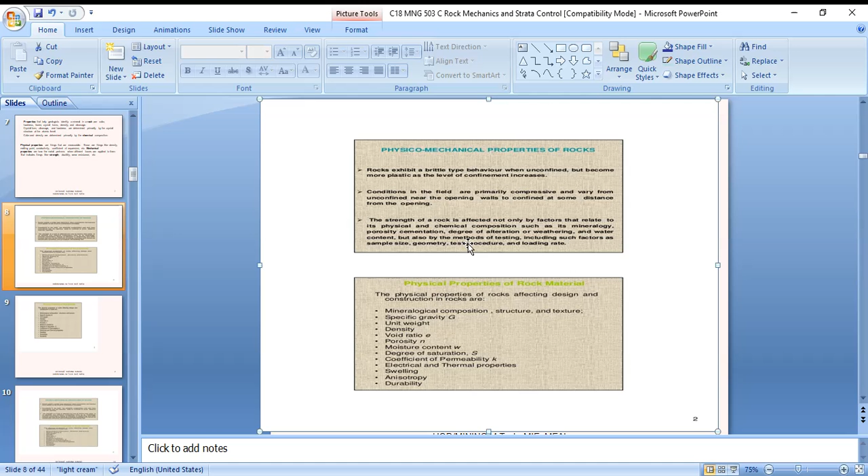Rocks exhibit a brittle type behavior when unconfined, but become more plastic as the level of confinement increases. Conditions in the field are primarily compressive and vary from unconfined near the opening walls to confined at some distance

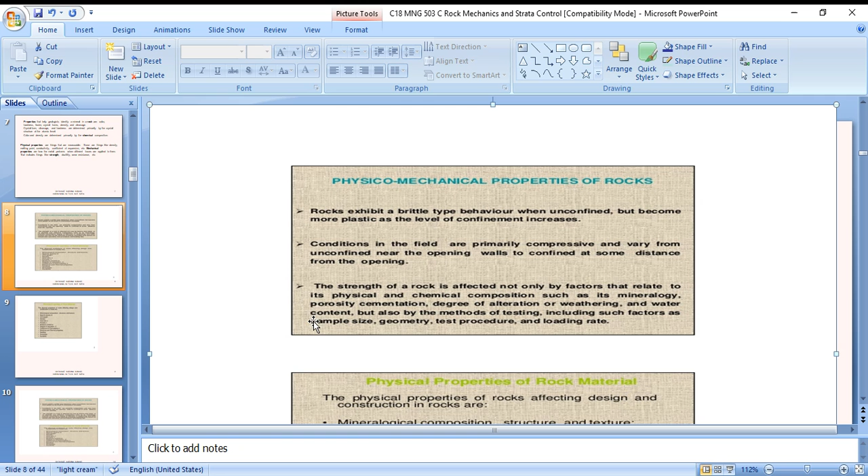from the opening. The strength of rock is affected not only by factors related to its physical and chemical composition, such as its mineralogy, porosity, cementation, degree of alteration or weathering, or water content, but also by the method of testing, including such factors as sample size, geometry, test procedure, and loading rate.

The physical properties of rock affecting design and construction in rocks are mineralogical composition, structure, and texture, specific gravity, unit weight, density, void ratio, porosity, moisture content, degree of saturation, coefficient of permeability, electrical and thermal properties, and swelling. So these are the generalized properties of the concept of the phenomena.

So coming to them one by one: mineralogical composition, texture. Texture is defined as the interrelationship of different mineral constituents of the rock. Based on the linkage between the individual grains, the rocks are broadly classified by the interconnections of the grains, coherent or coalescence bonds between the particles.

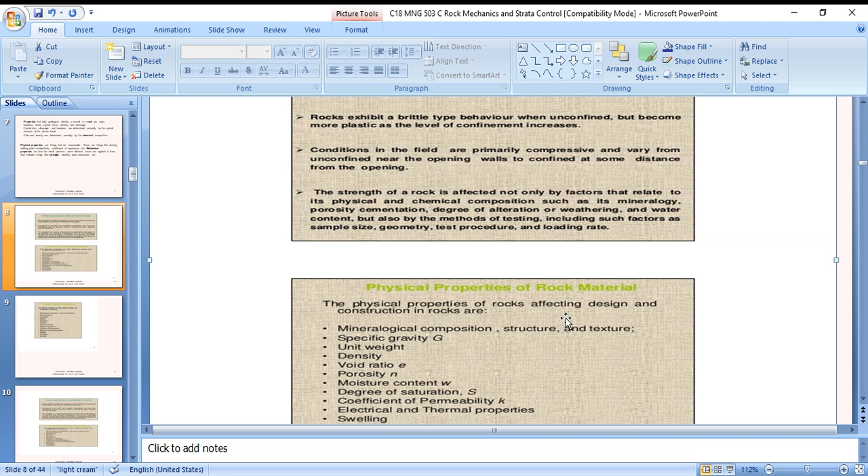Other properties include degree of saturation, coefficient of permeability, electrical and thermal properties, and swelling. These are also very important for knowing the physical properties of rocks concerned. Here is also durability, and some other properties are given here.

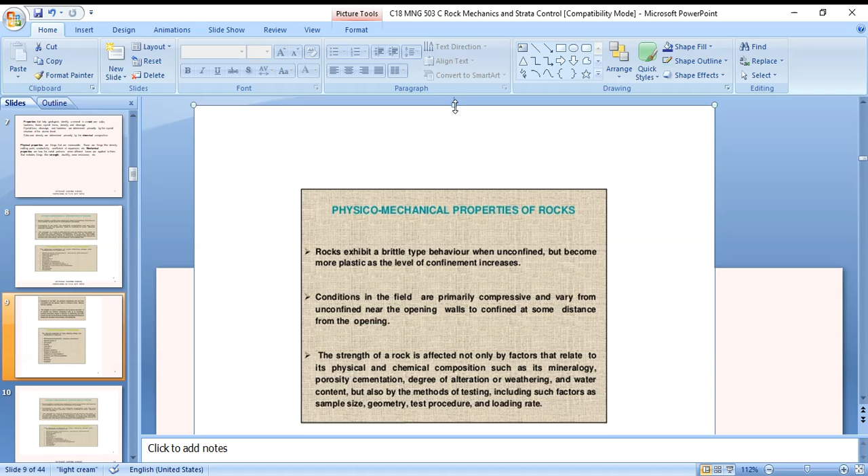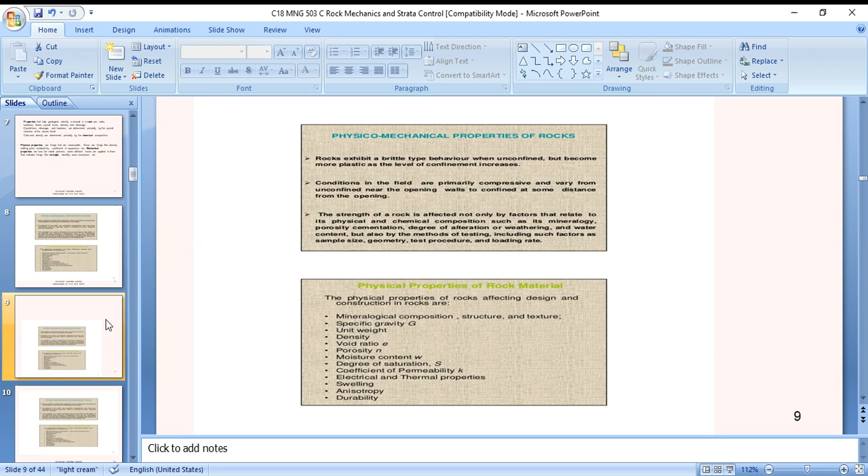Right, so this is one. Another, let's go for a similar one. Physical properties of rock material.

Mineralogical composition is an intrinsic property controlling the strength of the rock. Although there exist more than 2000 kinds of known minerals, only about 9 of them partake decisively in forming the composition of rocks. They are quartz, feldspar, mica, hornblende, pyroxene, olivine, calcite, kaolin, and dolomite.

Specific gravity is the ratio of the density of the solids to the density of water. This is a ratio where Ms is the mass of solids and Vs is the volume of solids. Unit weight can be calculated as W by V, where W is the total weight of the sample and V is the total volume of the sample. Density measures mass per unit volume of the rock.

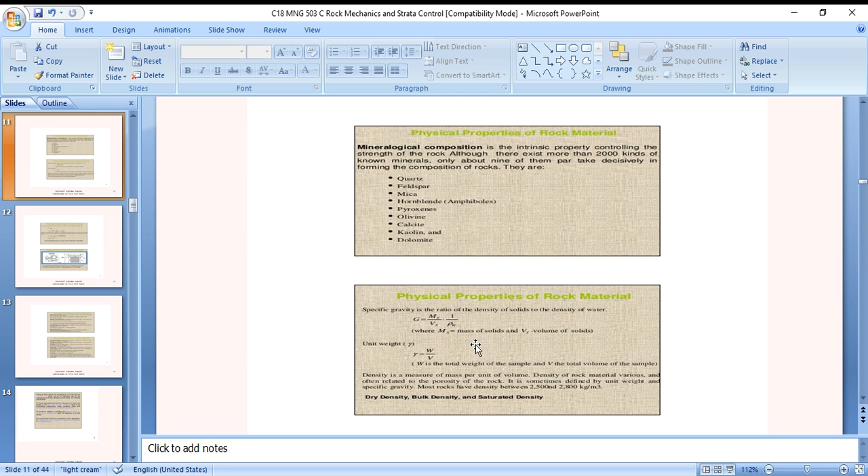Material density varies and is often related to the porosity of the rock. It is sometimes defined by unit weight and specific gravity. Most rocks have density between 2500 and 2800 kg for dry density, bulk density, and saturated density.

Physical properties of a rock material: the void ratio is the ratio of the volume of voids, Vv, to the volume of solids, Vs. A simple calculation by unit weight of water can determine the porosity. Physical properties also have units when considering porosity.

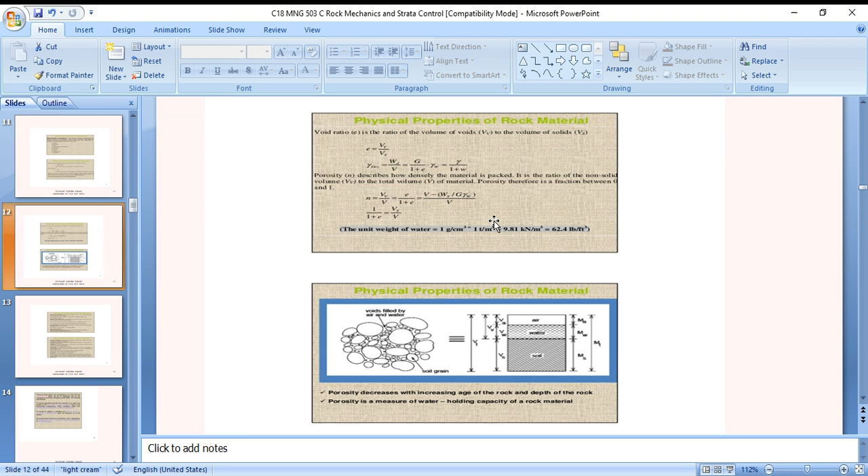Another physical property is moisture content. It is the ratio of the weight of water in the void to the weight of the dry solids in the rock sample. It can be expressed as M equals WW by WS, where M is the moisture content, WW is the weight of the water, and WS is the weight of the solid. This is a simplified formula for the calculation of moisture content.

Degree of saturation is defined as the volume of water in the void to the total volume of the void in the rock sample. So S equals VW by VV, where VW is volume of water and VV is volume of voids. The rock mass having higher porosity has a higher degree of saturation.

Permeability is the ability of the porous material to allow a liquid to pass through it, measured in centimeters per second or meters per second. Q equals K times the discharge area times the hydraulic gradient.

Electrical properties: most rocks have electrical nature, and measures of dielectric constant are used for data interpretation. Electric resistivity method is used in geophysics perspective.

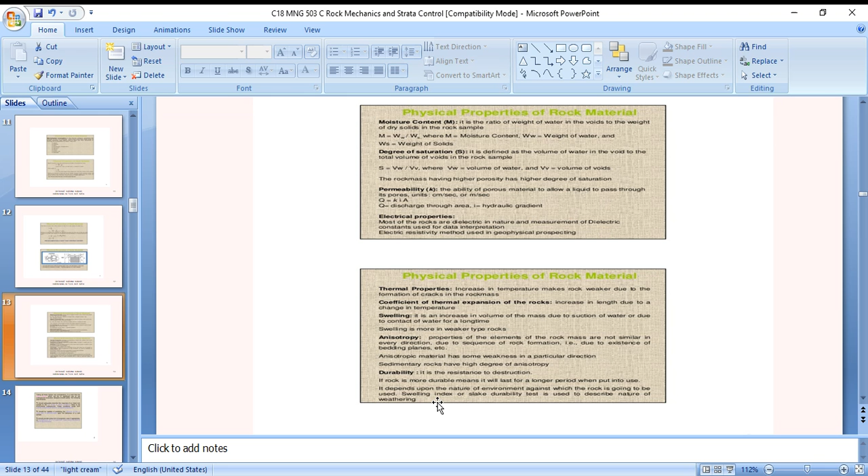Durability is the resistance to destruction. If a rock is more durable, it will last longer when in use. It depends upon the nature of the environment against which the rock is going to be used. The swelling index or slake durability test is used to describe the nature of weathering.

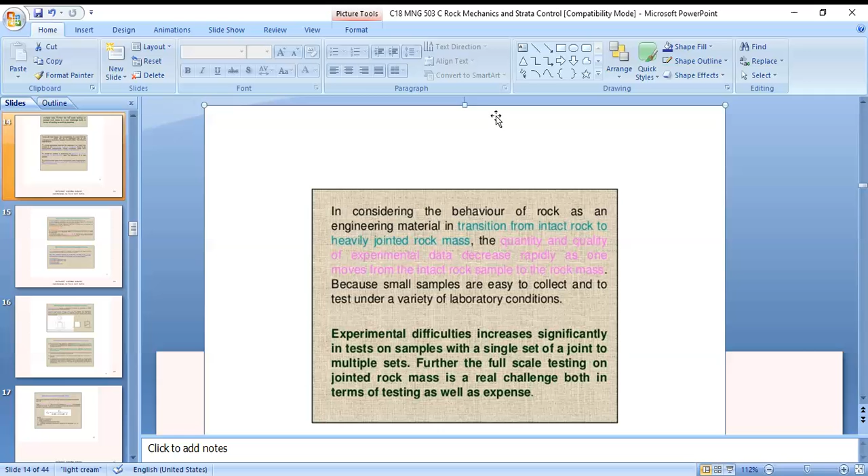In considering the behavior of rock as an engineering material, it transitions from intact rock to heavily jointed rock mass. The quantity and quality of experimental data decreases rapidly as one moves from intact rock samples to the rock mass, because small samples are easy to collect and test under a variety of laboratory conditions. Experimental difficulties increase significantly when testing samples with a single set of joints versus multiple sets.

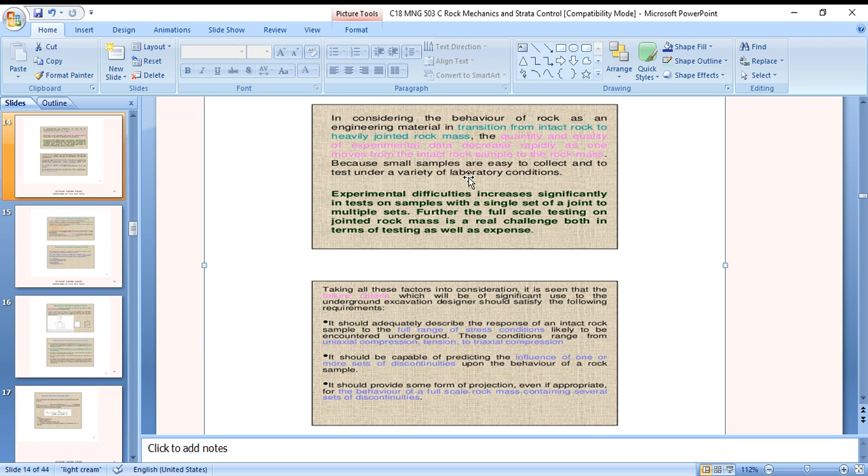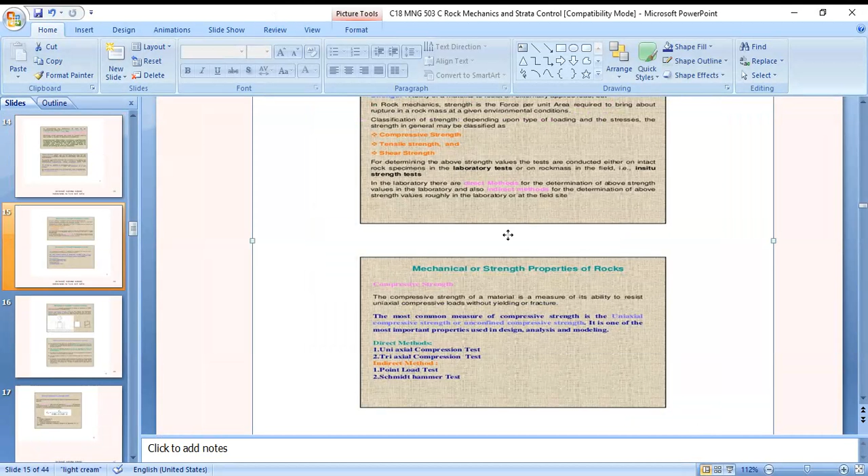So another mechanical property of concern is strength - the ability of the material to resist an externally applied load. In rock mechanics, strength is the force per unit area required to bring about failure of the rock mass, given the environmental conditions.

Classification of strength depends on the type of loading and its stresses. Strength is generally classified as compressive strength, tensile strength, and shear strength. For determining these strength values, tests are conducted either on intact rock specimens in laboratory tests or on rock mass in the field using in-situ strength tests.

In the laboratory, there are direct methods for determining these strengths. Beyond laboratory methods, there are also indirect methods for determining strength roughly, either in the laboratory or at the field site.

The compressive strength of a material is a measure of its ability to resist uniaxial compression loads without yielding or fracture. The most common measure of compressive strength is the uniaxial compressive strength, or unconfined compressive strength. It is one of the most important properties used in design, analysis, and modeling.

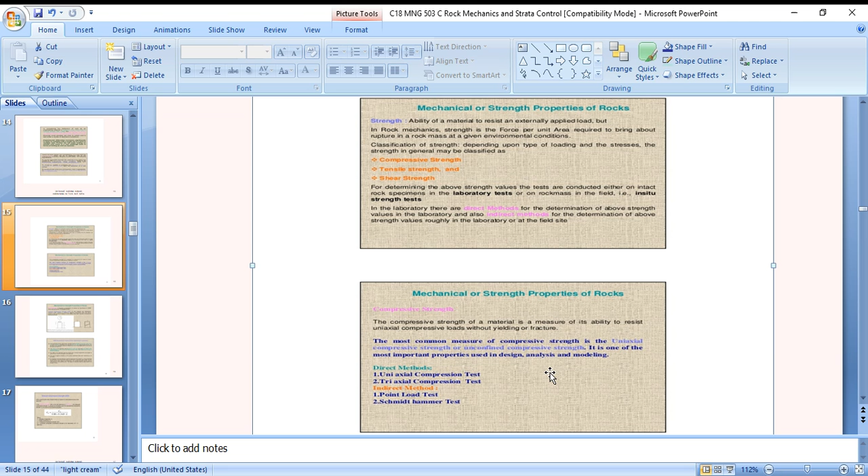What are the breaking strength, compressive strength, and tensile strength? These strengths can be understood through testing.

So uniaxial compressive strength is tested using a UTM. Rock material and deformation behavior under loading is studied by applying compressive load until failure occurs in the core, by a fracture in the middle, using high capacity compressive testing machines.

ISRM standard for testing rock specimens in laboratories: the test specimen shall be a right circular cylinder having a height to diameter ratio of 2.0 to 3.0, and diameter preferably not less than the NX core size, approximately 54 mm.

The diameter of the specimen should be related to the size of the largest grain in the rock by a ratio of at least 10 to 1.

The ends of the specimen shall be flat to 0.02 mm and shall not depart from perpendicularity to the axis of the specimen by more than 0.001 radians, or 0.05 mm in 50 mm.

The sides of the specimen shall be smooth and free of abrupt irregularities, and straight to within 0.3 mm over the full length of the specimen. The use of capping material or end surface treatment other than machining is not permitted.

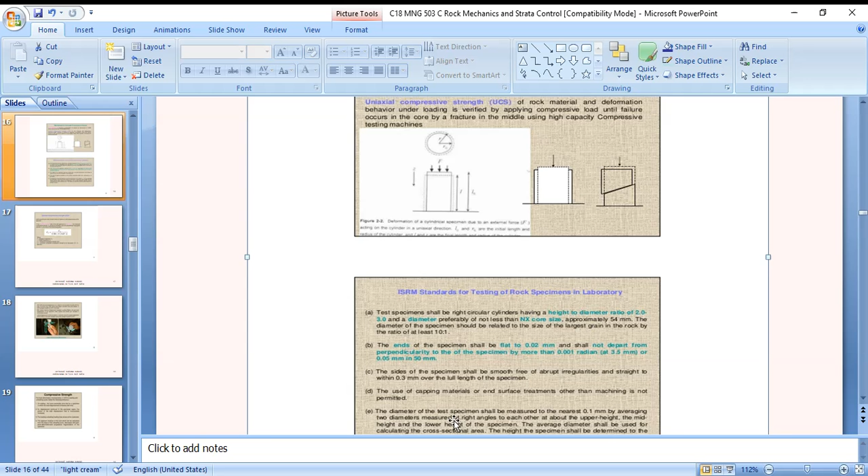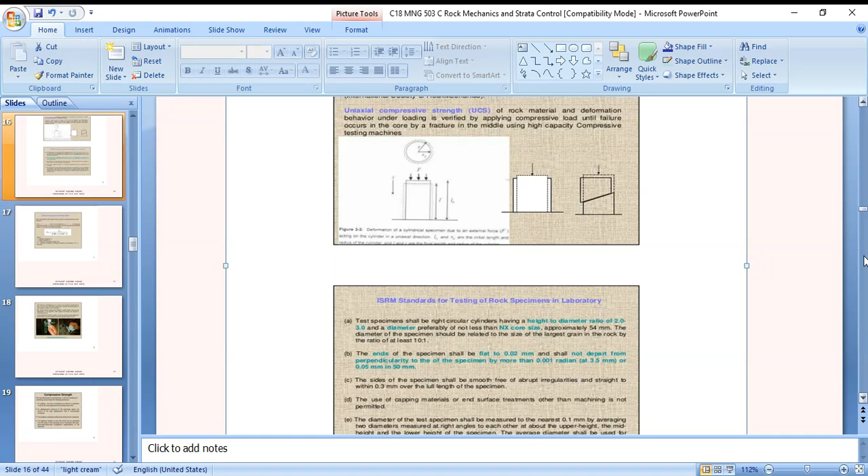The diameter of the test specimen shall be measured. Using the upper height, middle height, and lower height of the specimen, the average diameter shall be used for calculating the cross sectional area. The height of the specimen shall be determined to the nearest 1.0 mm.

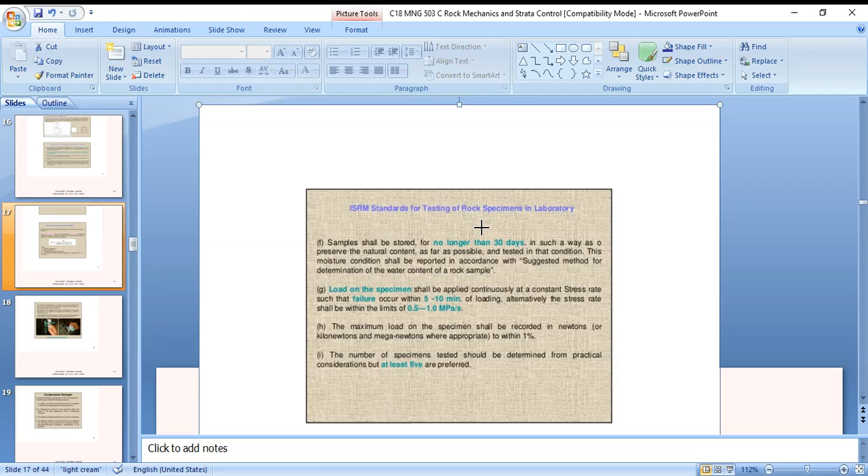Other ISRM standards for testing rock specimens in laboratories: samples shall be stored no longer than 30 days. This is important to note, in such a way as to preserve the natural moisture content.

Preserve no longer than 30 days in such a way as to preserve the natural moisture content as far as possible, and test in that condition. This moisture content should be reported in accordance with the suggested methods for determination of the water content of rock samples.

Load on the specimen shall be applied continuously at a constant stress rate, such that failure occurs within 5 to 10 minutes, and the loading stress rate shall be within the limit of 0.5 to 1 megapascals per second. The maximum load on the specimen shall be recorded in newtons, accurate to approximately within 1%.

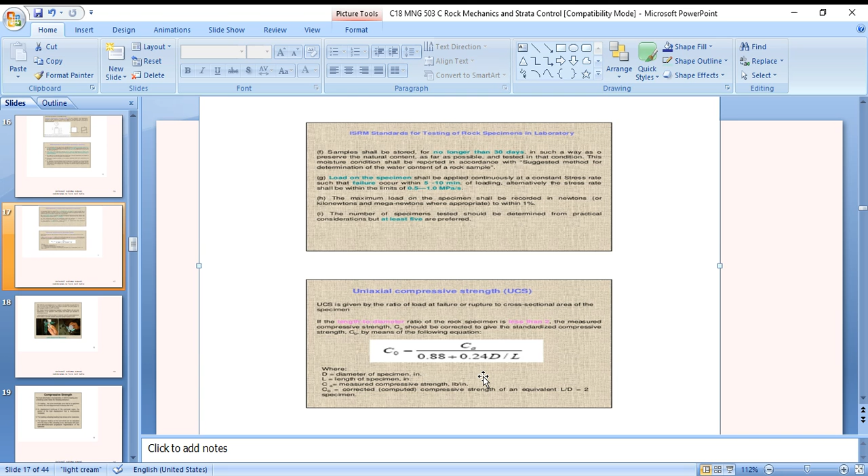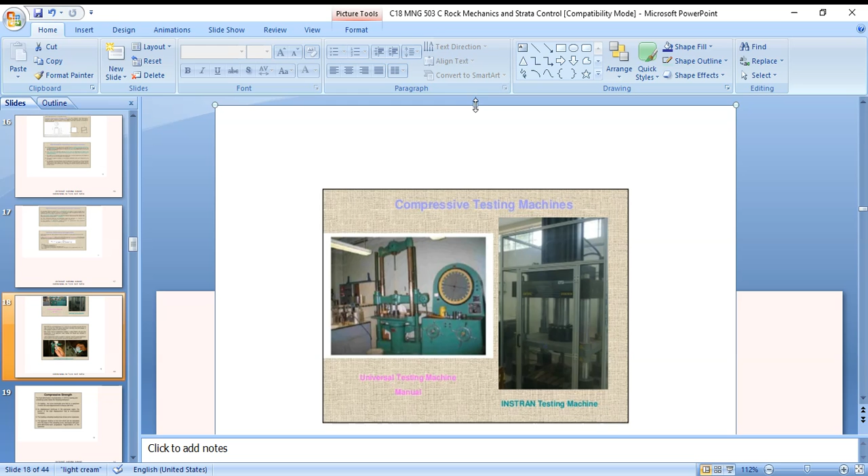This is a compressive stress testing machine. You can observe the sample collection and the load applied on it.

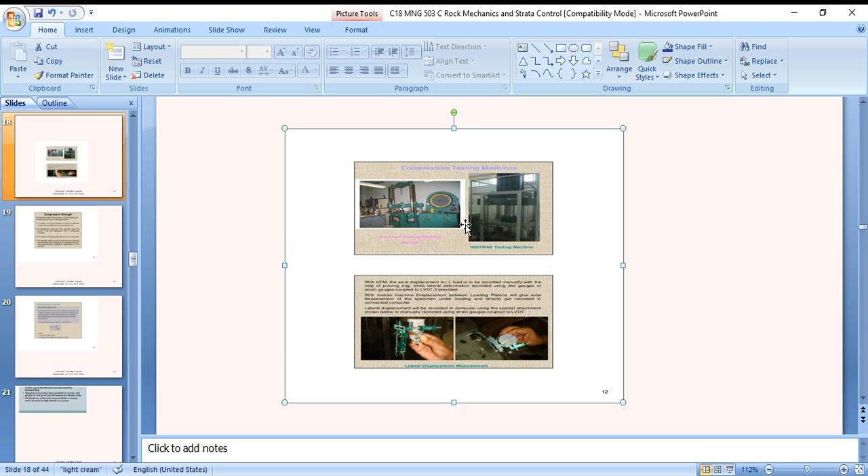This is a UTM machine under testing, showing compressive stress and the point of failure behavior.

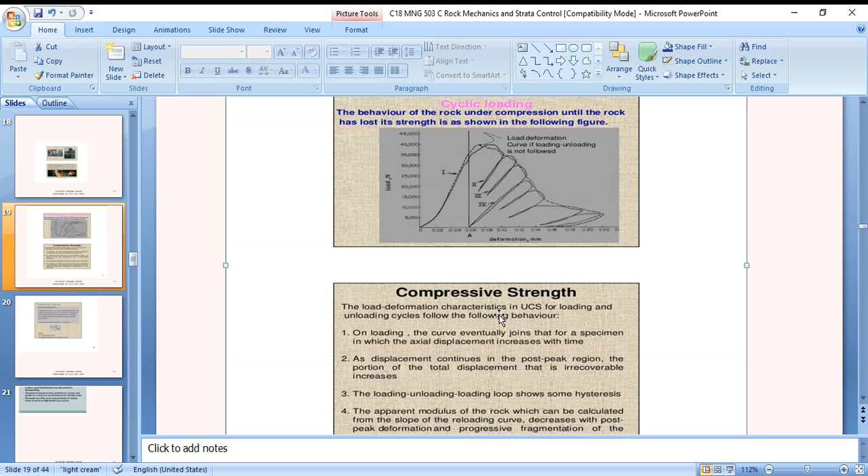Compressive strength and the load show the behavior during compressive testing. Some tests are conducted here.

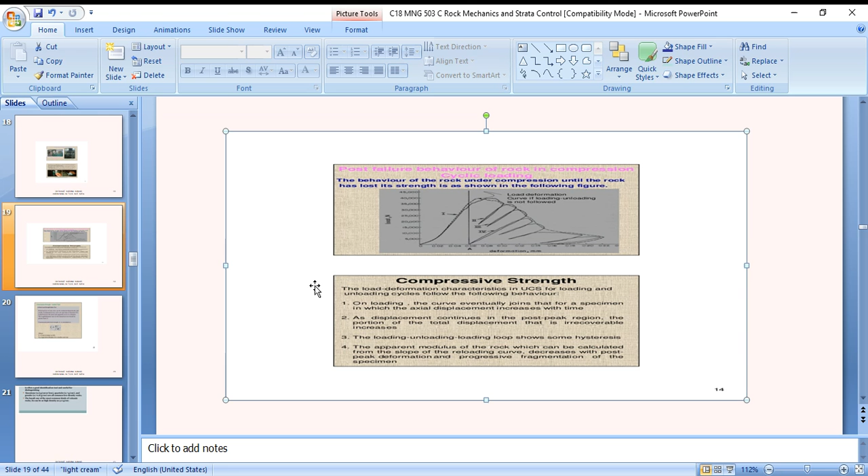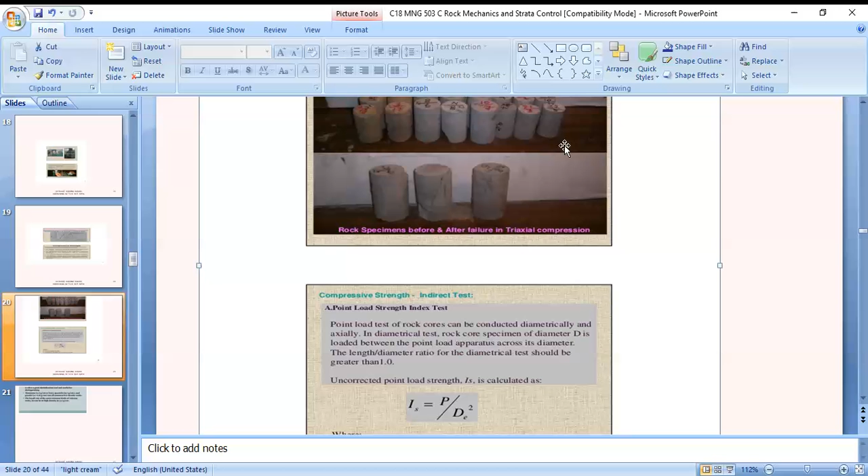This is an impact point load testing setup, showing the rock specimens before and after failure, in triaxial compression.

A point load test on rock can be conducted diametrically and axially. In a diametrical test, a rock core specimen of diameter D is loaded between the point load apparatus across its diameter. The length to diameter ratio for the diametrical test should be greater than 1.0.

The uncorrected point load strength is calculated as Is equal to P by De squared, where P is the load at failure in kilonewtons, and D is the equivalent diameter for the circular core.

The point load test is conducted in the field on an unprepared rock specimen using simple portable equipment. It involves compressing the rock piece between two points. The point load index is calculated as the ratio of the applied load to the square of the distance between the loading points. The point load test has variations such as the diametrical test, axial test, and irregular lump test.

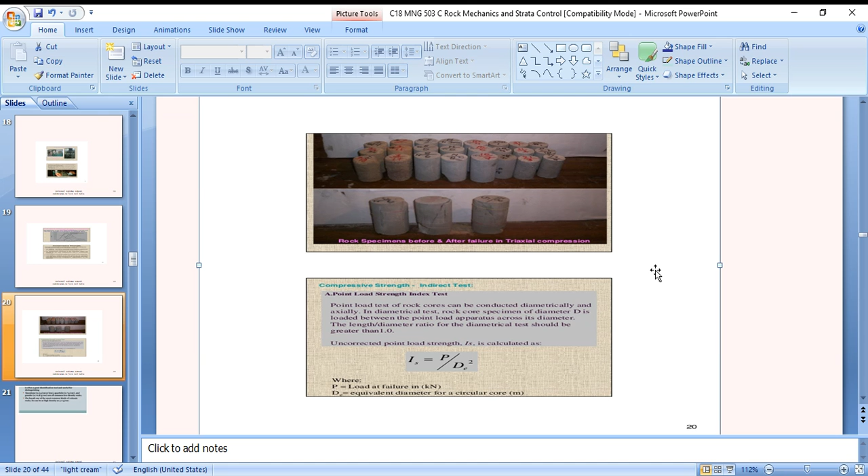Density is a term for how heavy an object is for its size. Density is usually expressed in units like grams per cubic centimeter, kilograms per cubic meter, or pounds per cubic inch.

Rocks generally have a high density. The density of a rock is often a good identification tool, useful for distinguishing types. Limestone density is about 2.6 grams per centimeter cubed, measured by mass over volume. Granite is almost 2.7 to 2.8, among other common low density rocks. Basalt, one of the most common volcanic rocks, has a higher density of around 3, along with other rock types.

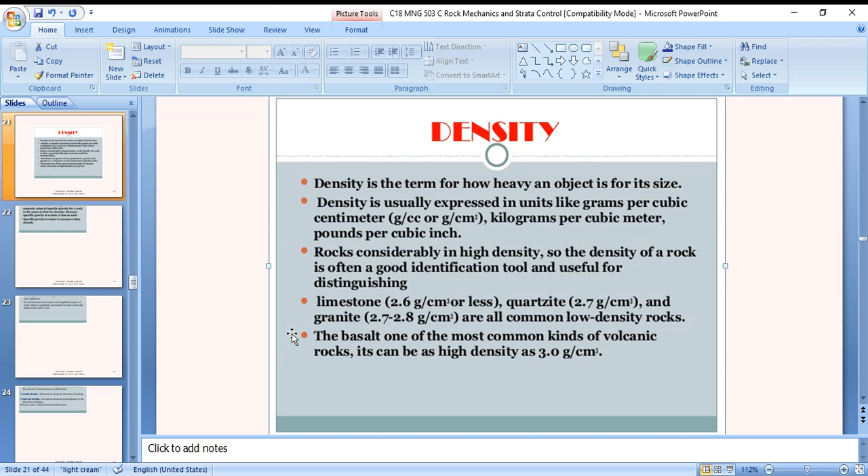Specific gravity, already learned, but we repeat here: it is the ratio of the mass or weight of a rock to the mass of the same volume of water. Water has a density of 1.0 gram per centimeter cubed. So the numerical value of specific gravity for the rock is the same as its density, because specific gravity is a ratio and has no unit. Specific gravity is easier to measure than density.

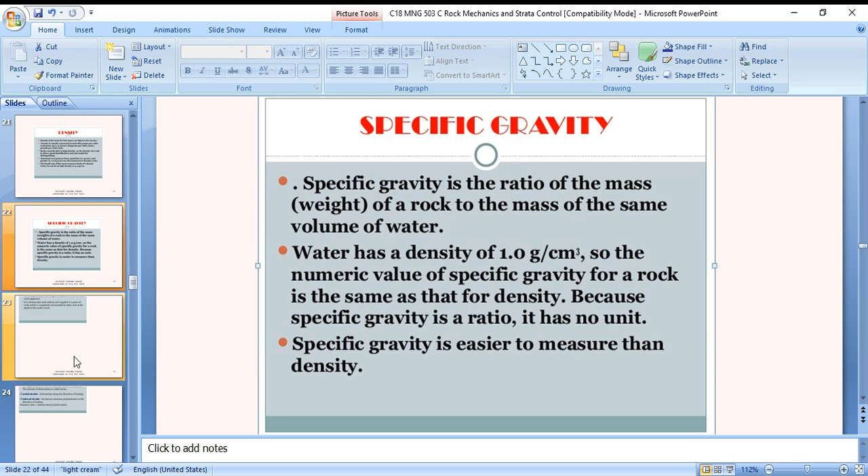The strength of a material is defined as the load under which the material cracks and disintegrates. The experimental definition of strength is determined by increasing the load and observing the point at which the first crack appears. It is obvious that such a criterion cannot apply to a piece of rock completely surrounded by other rock at depth in the earth's crust.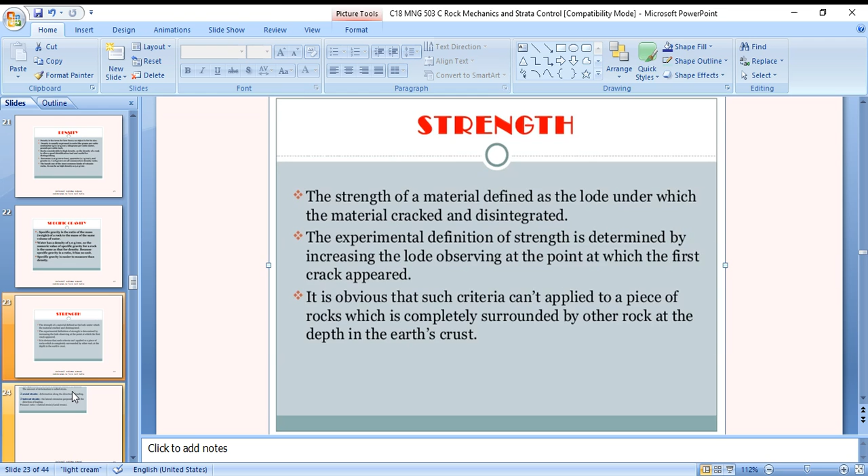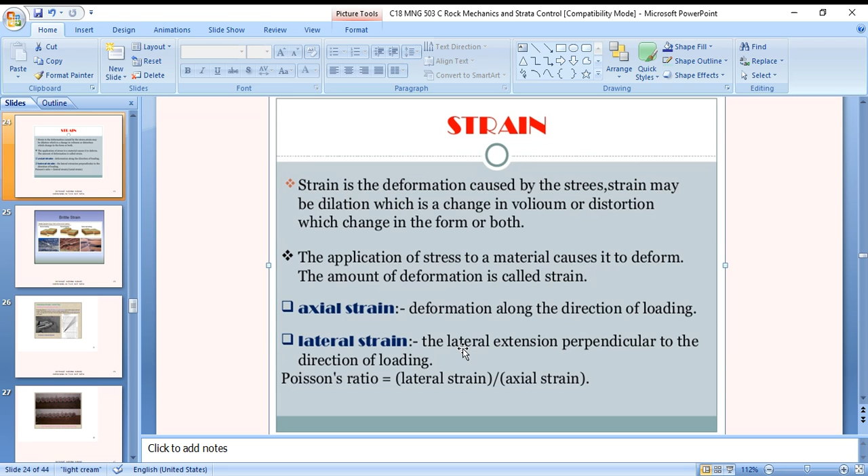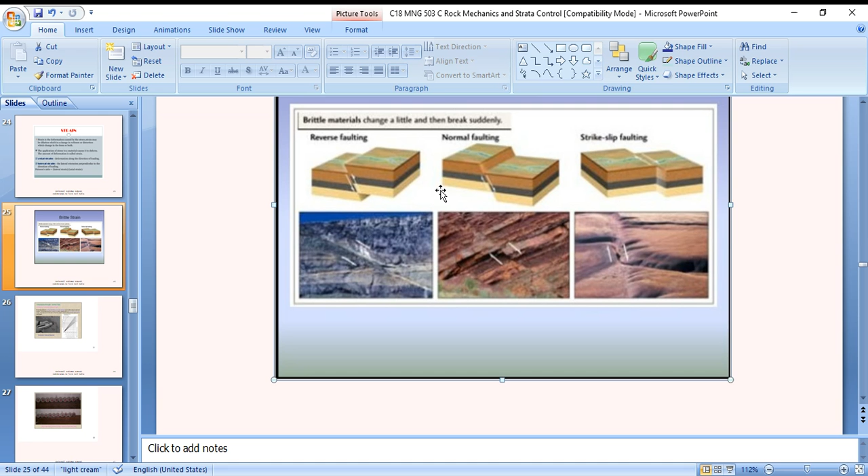So brittle material changes little and breaks suddenly. So this is a regular property of the rock; normal faulting, reverse faulting and strike-slip are shown here in the figures for understanding purposes. This is called brittle strain.

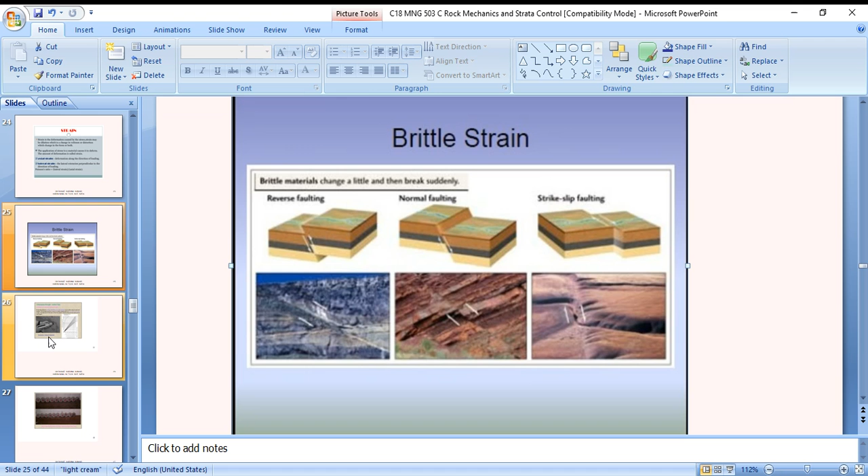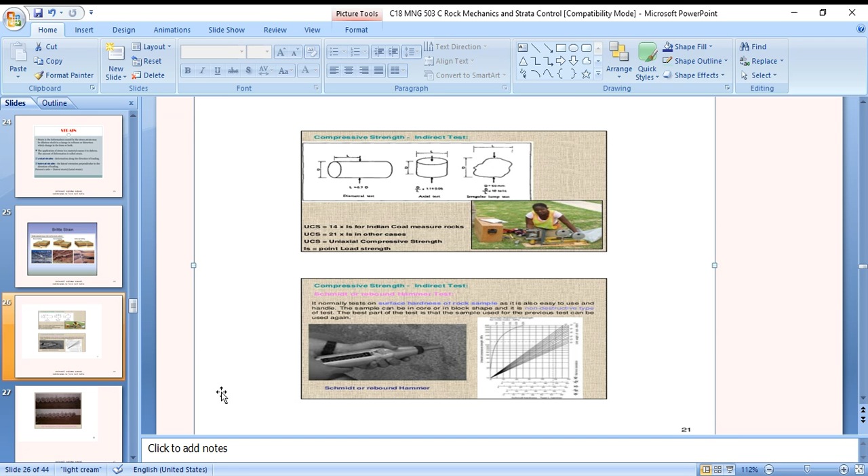Then this is also one graphical method of representation. Right. Compressive strength with cylindrical specimens, L equal to D, the D by L ratio. UCS 14 is for Indian coal measure rocks, 21 in other cases. Uniaxial compressive strength and point load strength. These are the sample collections.

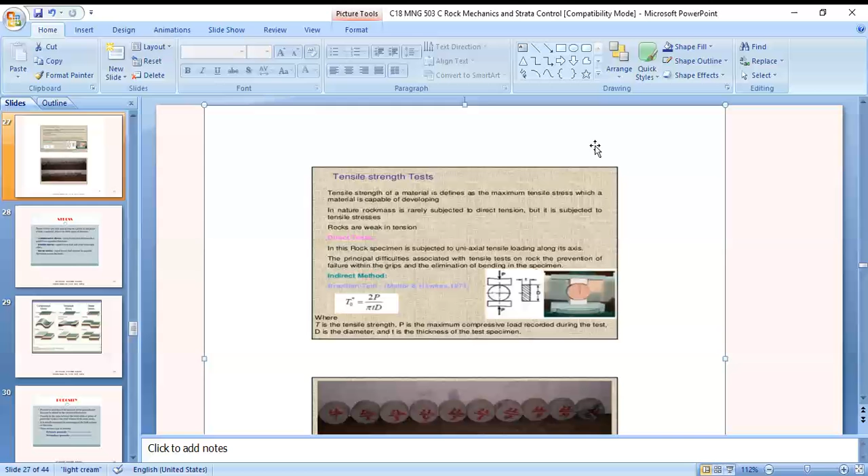Right. This is a tensile strength test, nothing but a Brazilian test. Tensile strength of the material is defined as the maximum tensile stress which the material is capable of developing. In nature, rock mass is rarely subjected to direct tension, but it is subjected to tensile stress. Rocks are weak in tension.

In the direct test, the rock specimen is subjected to uniaxial tensile loading along its axis. The principal difficulties associated with the tensile test on rock are the prevention of failure within the grips and the elimination of bending in the specimen; hence the indirect method. This is T = 2P by πDt, where T is the tensile strength, P is the maximum compression load recorded during the test, D is the diameter and t is the thickness of the test specimen.

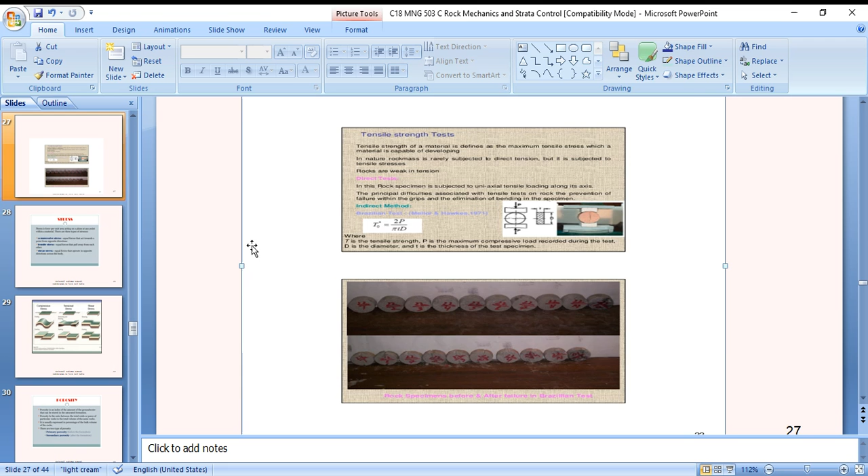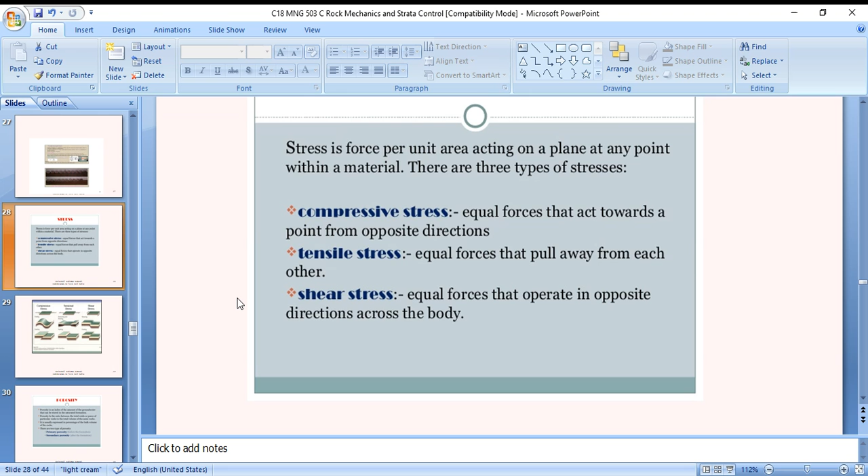Stress is a force per unit area acting on a plane at any point within the material. There are three types of stresses. Compressive stress: equal forces that act towards the point from opposite directions. Tensile stress: equal forces that pull away from each other. Shear stress: equal forces that operate in opposite directions across the body. Compression stress, tensile stress, shear stress: folding, stretching and thinning, and shearing.

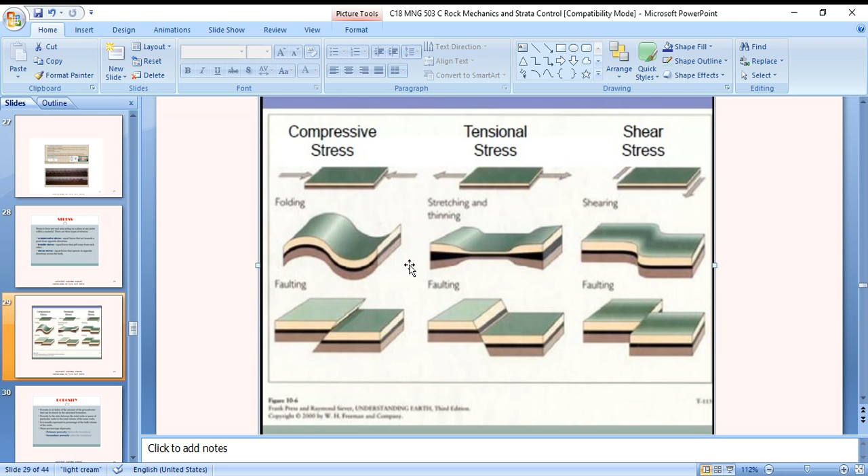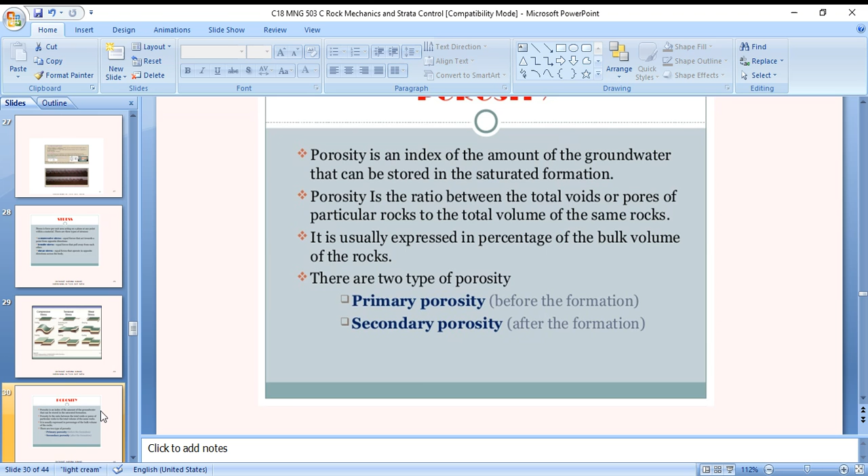Porosity is an index of the amount of groundwater that can be stored in the saturated formation. Porosity is the ratio between the total voids or pores of a particular rock to the total volume of the same rock. It is usually expressed as a percentage of the bulk volume of the rock. There are two types of porosity: primary porosity and secondary porosity. Primary openings, and these are the various types of porosity, primary and secondary openings of the rock samples.

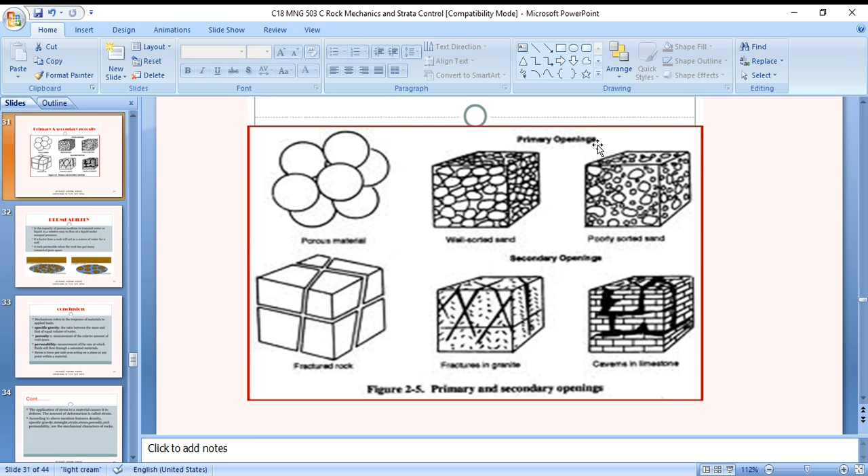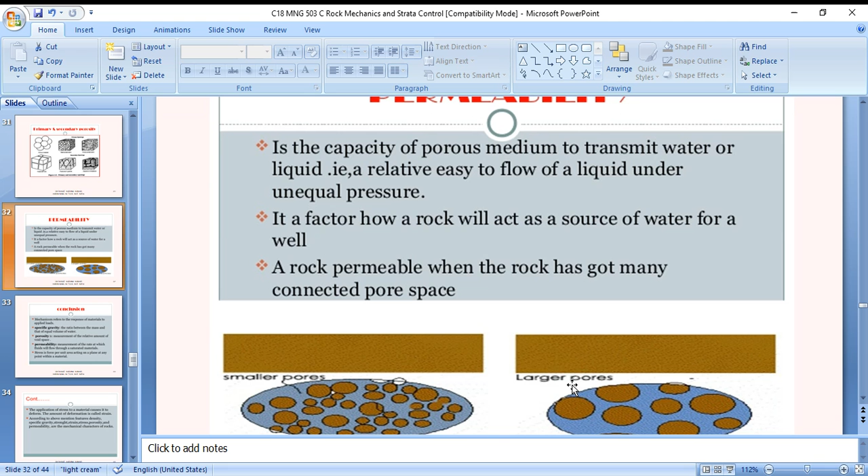And then another is the capacity of the porous media to transmit water or liquid, the relative ease of flow of liquid under unequal pressures. It is a factor how rock will act as a source of water for the well; the rock is permeable when it has many connected pore spaces, that is large pores and small pores.

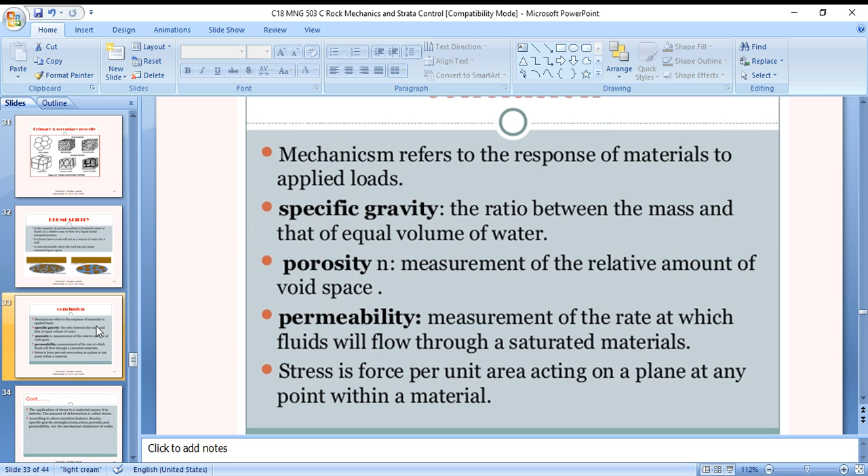Mechanics refers to the response of material to applied load. Specific gravity is the ratio between the mass and an equal volume of water. Porosity measures the relative amount of void space. Permeability measures the rate at which fluid will flow through a saturated material. Stress is force per unit area acting on a plane at any point within the material. The application of stress to the material causes it to deform. The amount of deformation is called strain. According to the above, density, specific gravity, strength, strain, stress, porosity, and permeability are the mechanical characters of the rock.

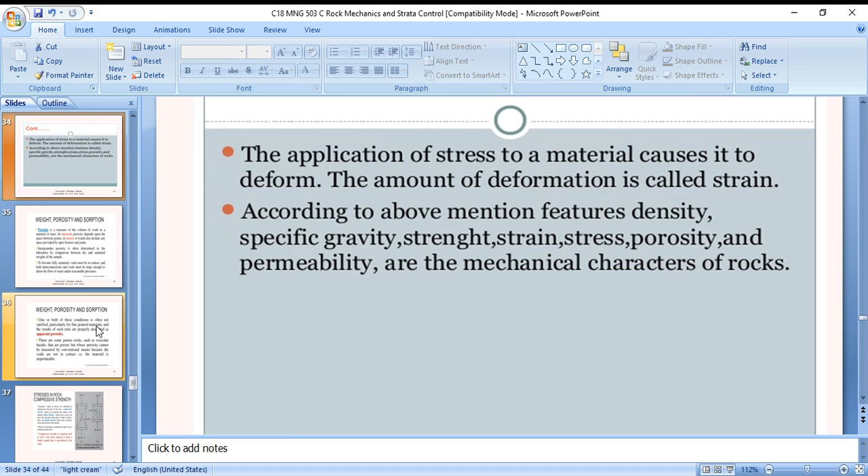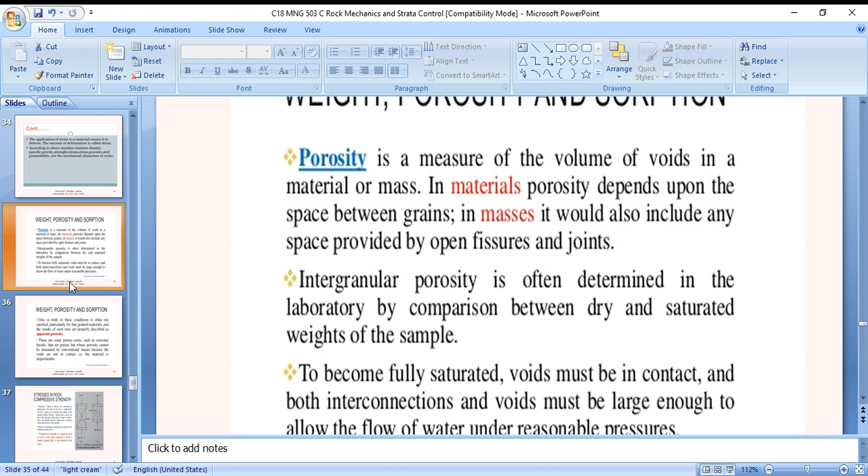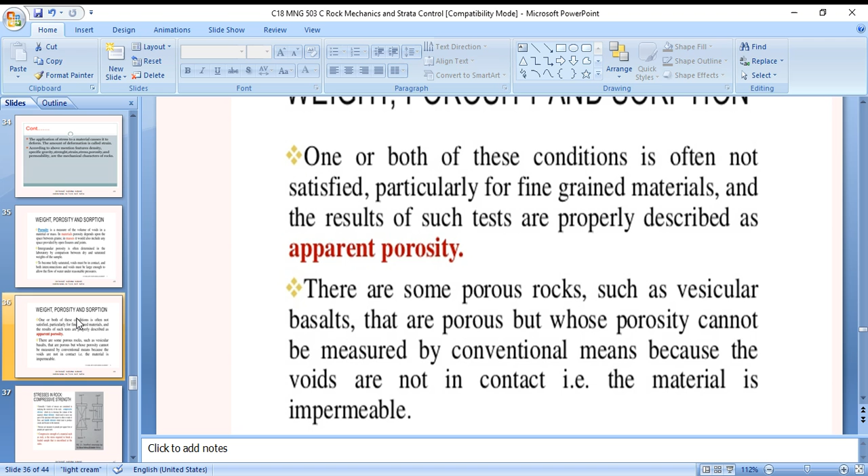Next, one or both of these conditions is often not satisfied, particularly for the fine-grained material, and the results of such tests are properly described as apparent porosity. There are some porous rocks, such as vesicular basalts, that are porous but whose porosity cannot be measured by conventional means because the voids are not in contact, that is, the material is impermeable.

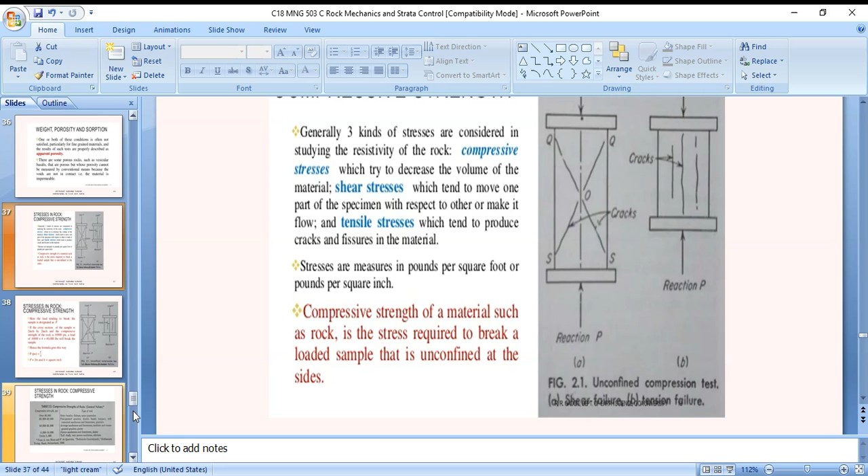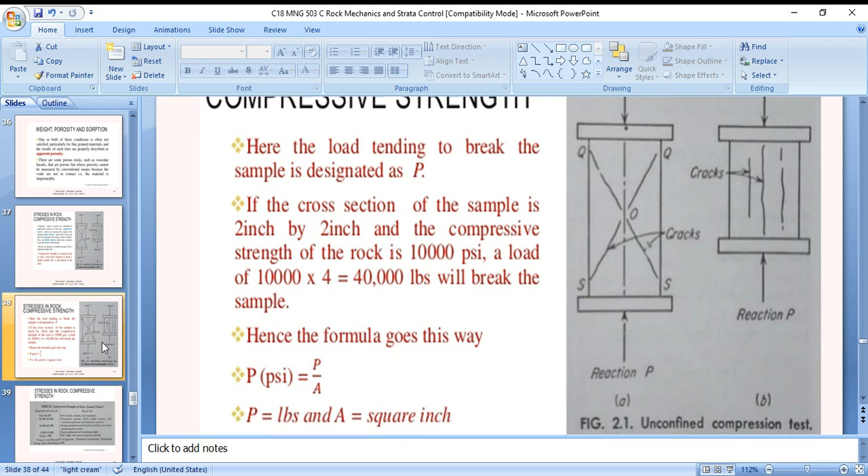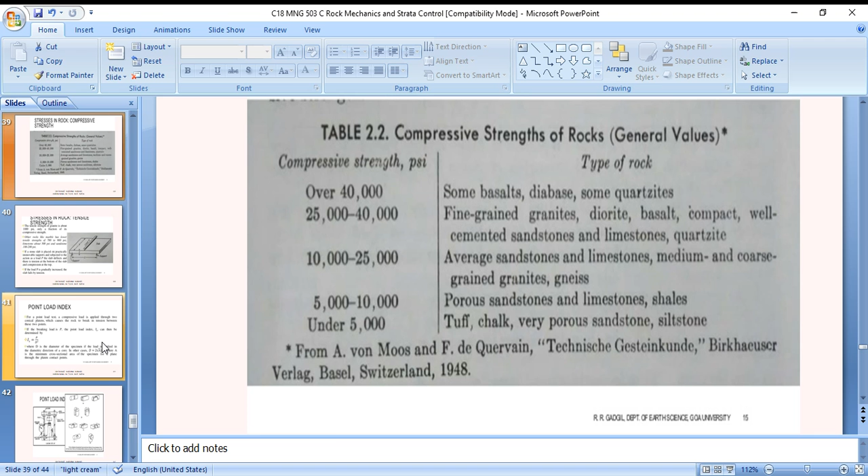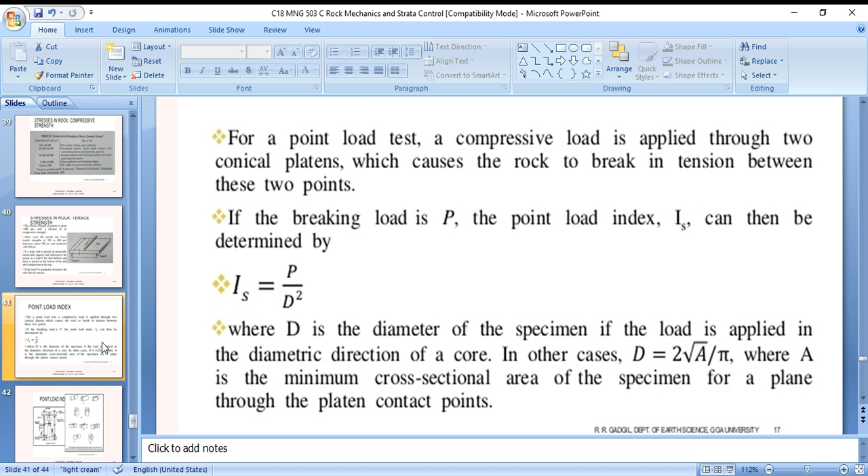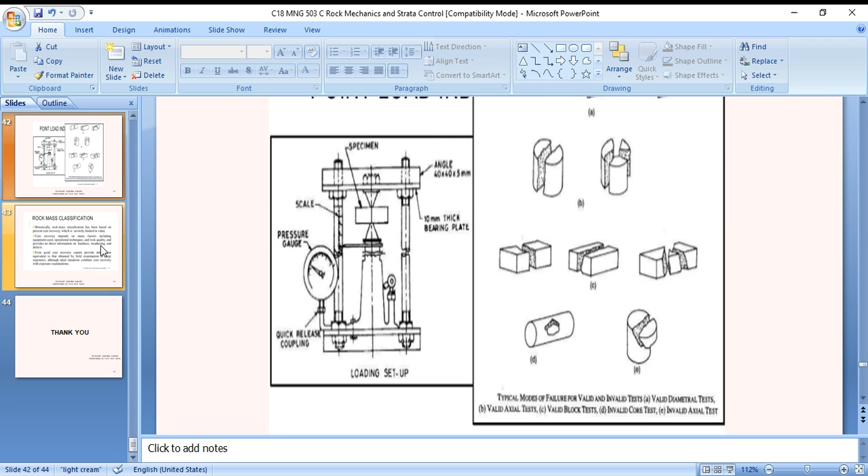Right. Rock mass classification is also another important one, which historically has been based upon core recovery. Core recovery depends on many factors, including equipment used, operational techniques, and rock quality, and provides us no direct information on the hardness, weathering, and defects. Even good core recovery cannot provide information equivalent to that obtained by field examination of a large exposure, although the ideal situation is to combine core recovery with exposure examinations.

So with this, I'm going to conclude and repeat once again the various properties you studied here. For studying rock mechanics, we need these very essential properties, particularly there are some technical parameters also. Unit weight is one of them. Movement and deformation under load, static and dynamic strength, indentation hardness, cohesion, angle of internal friction, Young's modulus, Poisson ratio, nature of the primary rock stress, impact resistance, resistance to mechanical abrasion,